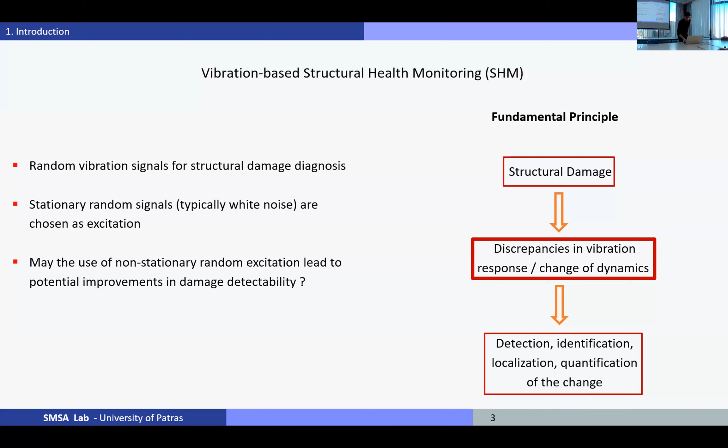With all this being said, the question is still important, but rather of theoretical importance than practical, and concerns whether the non-stationary nature of these excitations facilitates the damage detection ability. But this may change in a laboratory setting, for example, where the excitation is fully user specified. Practicality is then restored.

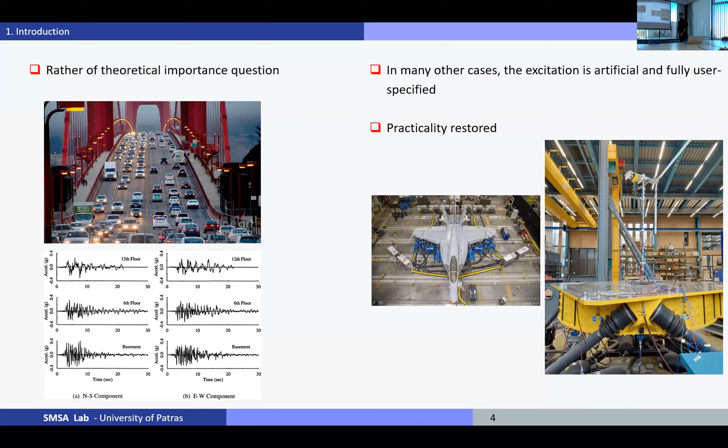The underlying idea is that non-stationary excitation is characterized by richer structure and more complicated properties. These properties involve the autocovariance function and the power spectral density function, which show time dependency. The mean value may also be time dependent. These rich time-dependent characteristics, compared to the stationary counterparts where there's no time dependency, are carried over to the response and may be more prominently affected by damage, thus leading to improved diagnosis.

To illustrate this and make you understand better, here on the left we can see the power spectral density of a non-stationary signal. We can treat this spectrum, which is a function of two variables, time and frequency, as frozen-time power spectral densities at every time instant. So it is easily understandable that it's easier to detect damage when we have this instead of just one power spectral density function.

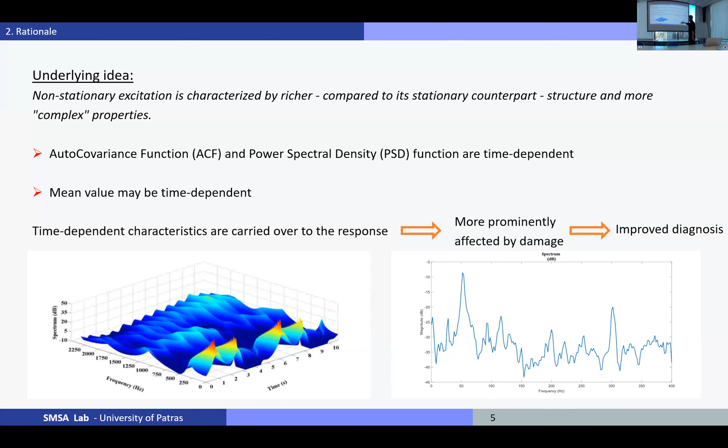In our study, we employ a non-parametric statistical time series damage detection method, with the characteristic quantity being the power spectral density function of the structural response. The excitations we are testing are of two types: first, conventional stationary white noise, and then a non-stationary one produced via a TAR model spectrum.

We have also employed two structures: a one degree of freedom mass-spring-damper system in MATLAB and a composite beam designed in Abaqus. Both structures are used under healthy and unhealthy structural states. Damage detectability is then expressed as a distance in the response PSD between the healthy and damaged structural states. The idea here is very simple. The higher the distance between the response PSDs, the higher the discrepancy between them, and this leads to improved damage detectability.

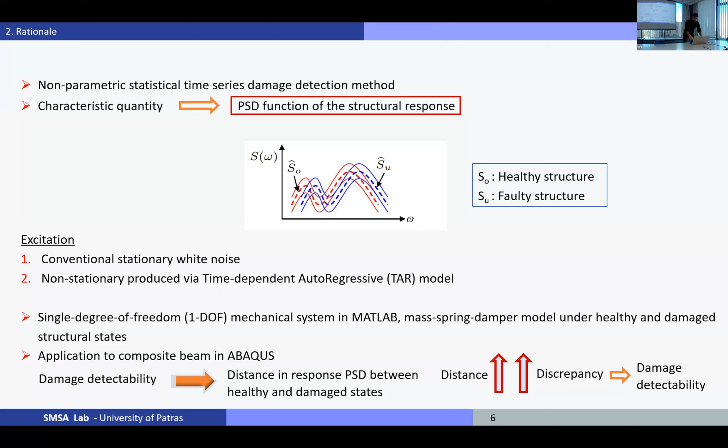In our work, we are firstly computing the theoretical output spectrum using mathematical formulas. We do this for both the stationary and the non-stationary case. The linear mass-spring-damper system is excited using the spectrum of non-stationary TAR2 excitation and the spectrum of stationary white noise excitation. And then we derive the output spectrum in both cases. We also do this for a damaged structure.

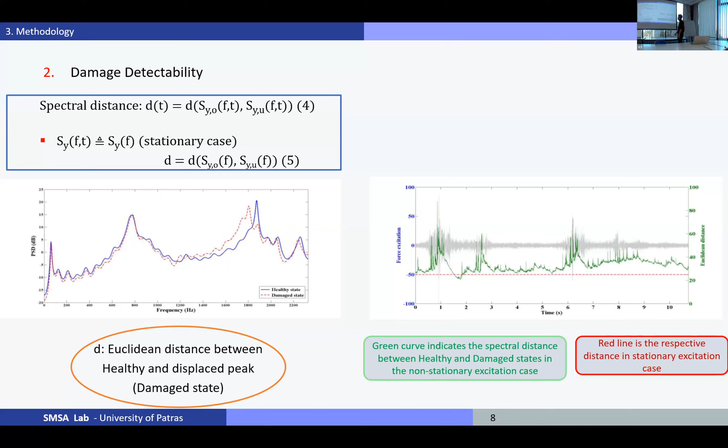I have inserted a plot from a very similar research work, which shows that indeed the distance is higher in the non-stationary excitation case. The distance between the damaged and the healthy output power spectral densities is higher in the non-stationary case, and this suggests that non-stationary excitation may potentially lead to better damage diagnosis.

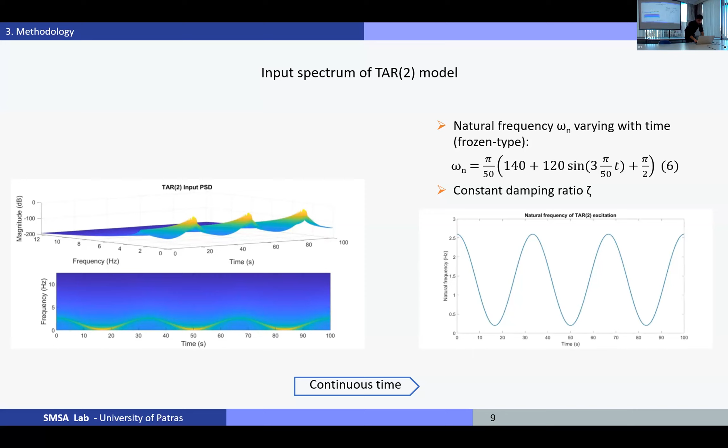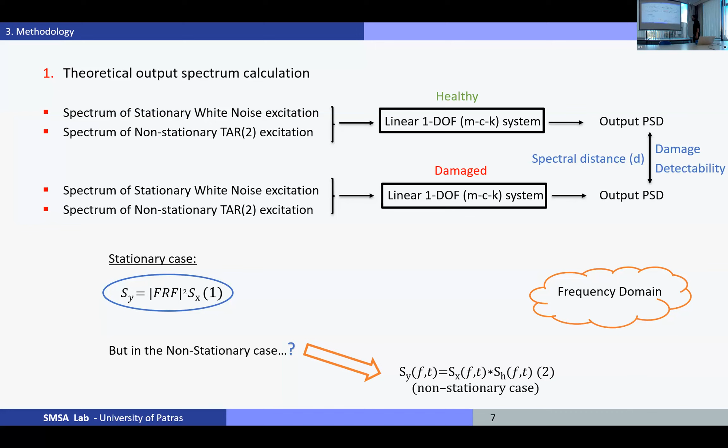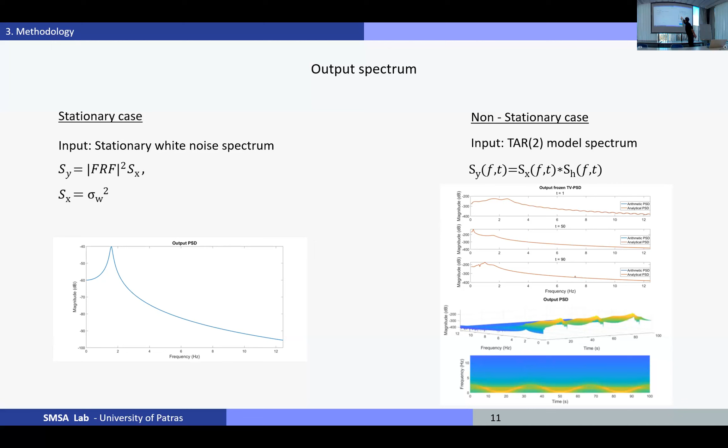This slide summarizes what has already been said. Here we can see what we used for input in the stationary case and for input in the non-stationary case. And here is the resulting output power spectral density function. And here is the non-stationary, which, as already stated before, can be treated as frozen type power spectral density functions at every time instant. We can also notice that these output spectra are influenced by the dynamics of the structure, since we see a peak at the natural frequency of the system, which is approximately at 1.6 Hertz. You can also see the peak in the non-stationary case.

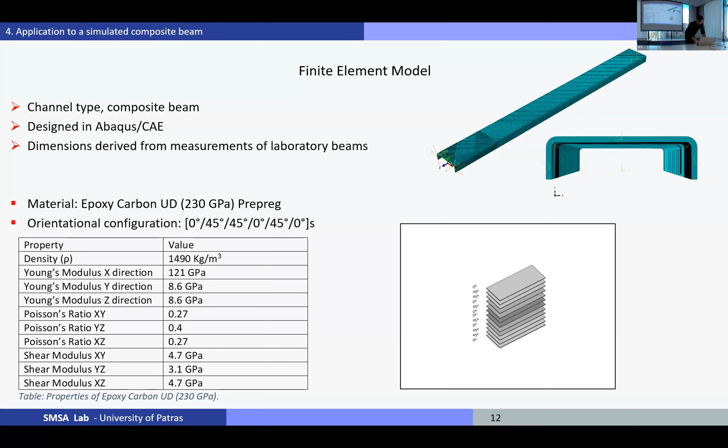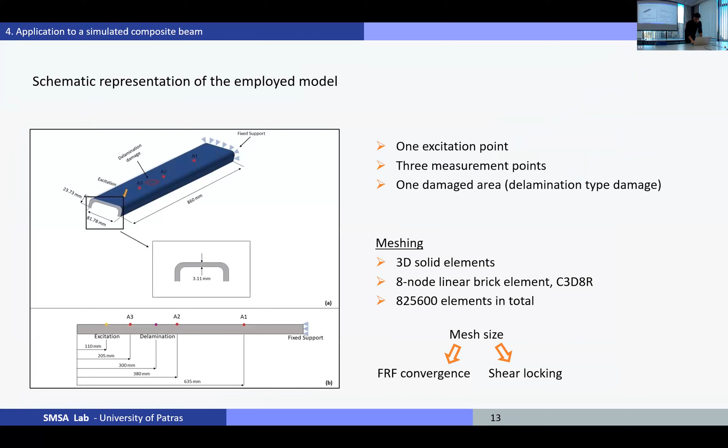And now I will give you a quick overview of the composite beam model, which was designed in Abaqus. The dimensions were derived from measurements of laboratory beams. We see the material used and the configuration of the plies, which is symmetrical. I don't want to focus so much on this, and there is one excitation point. There are also 3 measurement points from where we are going to measure the acceleration response of the beam. There is also one damaged area. The damage scenarios are 3, and are all of the delamination type damage of 3 different magnitudes. This damage was represented by overlapping duplicate nodes, so that the plies can open during an analysis of the model.

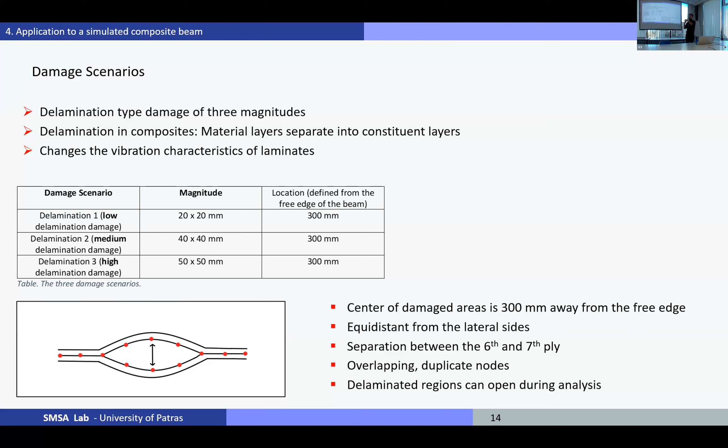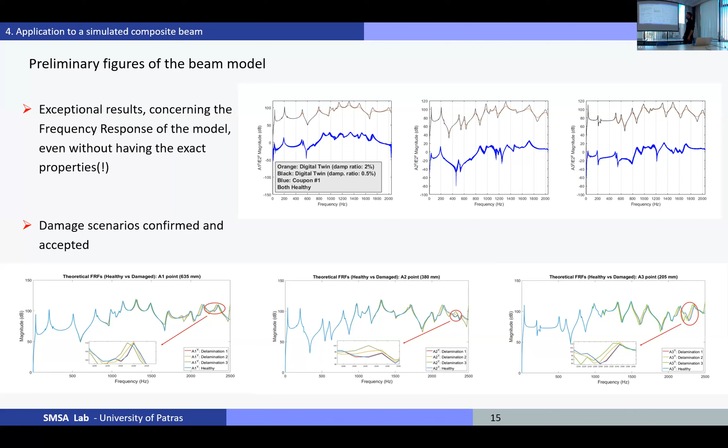And also, the three delamination type damage scenarios are confirmed. As we can see, we see some deviations between the healthy and the damaged structural states. This means that our damage scenarios are okay to use.

As we are going towards the end of the presentation, I would also like to quote what needs to be done in order for this work to be complete.

We need to consider some damage scenarios also regarding the 1 degree of freedom system in MATLAB. We also need to calculate the output power spectral densities in all structural states and compare the results. A genetic algorithm may also be used for optimizing the non-stationary excitation design, with the optimized parameter being the natural frequency of the non-stationary excitation.

Regarding the finite element model, we will run some Monte Carlo simulations on the composite beam. After that, we will assess the benefit of using non-stationary signals instead of the conventional stationary excitation.

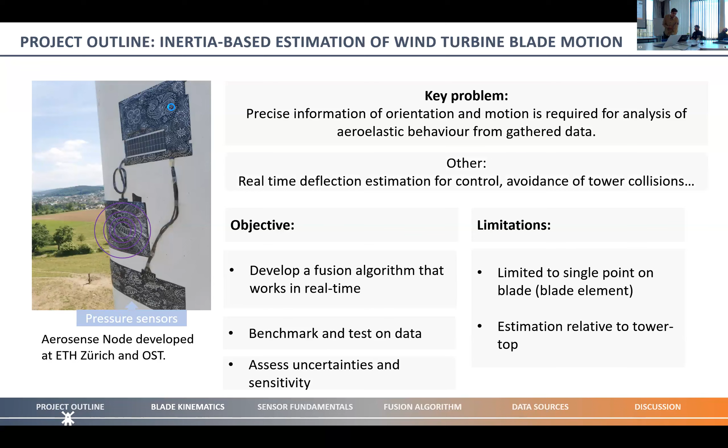So to outline, we start with the inertial sensor and we know where we want to go. We want to achieve an estimate of the blade position. And there are basically two approaches that we can follow.

The model-specific approach heavily involves structural dynamics. We can simulate the whole blade, its aerodynamic conditions, its motion, especially the deflections. For this, we need rather detailed knowledge of the blade, material, and real-world behavior. This greatly varies from the manufacturing specifications, but it has the benefit that we get the whole deflection. We can estimate loads and stresses.

The second approach is model agnostic, where we just pretend that our sensor basically free floats through space, not even attached to anything, and it rotates about some point, and that's all we know. So we completely ignore the blade, and then later use the fact that this sensor is attached to one blade segment to work backwards to extract the blade state. What's special about this kinematic approach is we have pure motion, so no forces, no masses, no impulse, no energy, which makes it easily applicable to any blade without structural information.

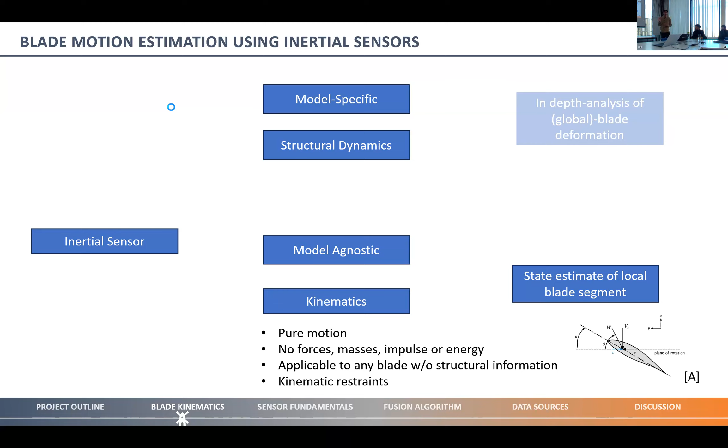And we can use known kinematic restraints, for example from the degrees of freedom, to couple the different dimensions. And that's what we work with. I chose this approach.

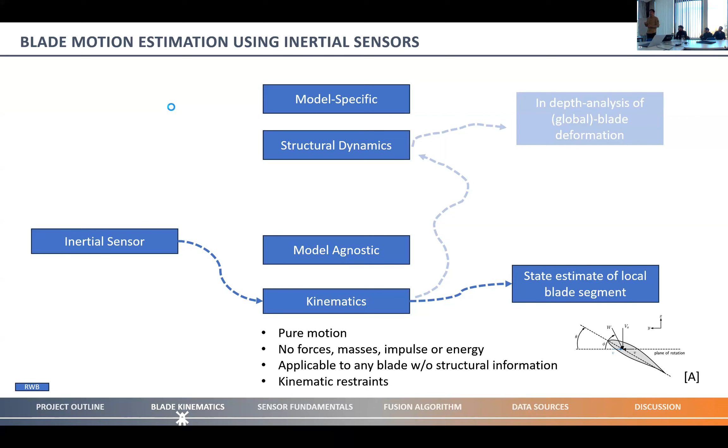Something you sometimes see in literature is that you use kinematics to kind of filter the inertial sensor data, and then later use the improved measurements for, for example, some model simulations. I might do that if I have the time, but for now it's not scheduled.

Okay, so next we will go into the blade kinematics. Any questions so far? Maybe best for the recording, you keep them for the end. Okay, keep them for the end.

So as I wrote here, blade kinematics is a question of varying complexity. As with any other model, there are different complexities that we can choose, and the more complex we make it, the harder it becomes. We can have this simple turbine that has just 2D, it has 1 degree of freedom, it can rotate, that's it. Then we can have the 3-dimensional turbine with controls.

It can pitch, meaning it tilts its airfoil to get an optimal position in the wind flow. It can yaw to turn towards the direction of the strongest wind, and then it can also rotate around - here you see it's a tilted axis. And then last but not least, you can have something crazy like a floating offshore platform where the base can move, the tower can deflect, and then the blades have torsion. They can deflect flap-wise and edge-wise.

For now, I will stick to the simple model, and I think it's sufficient to understand the whole concept. It doesn't really change with added complexity, it just gets more - it just takes longer, and I will make a lot more mistakes.

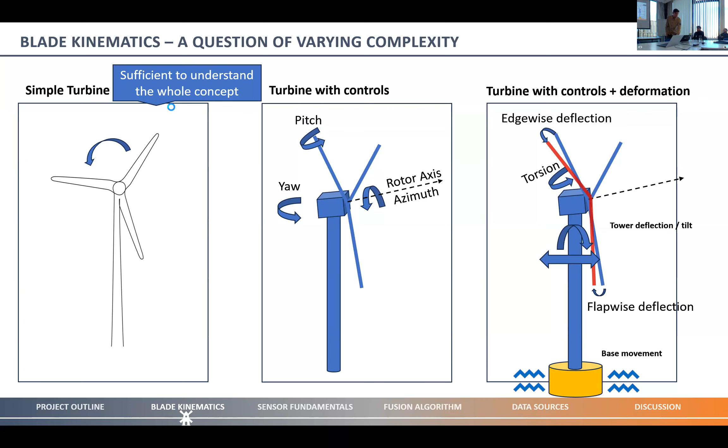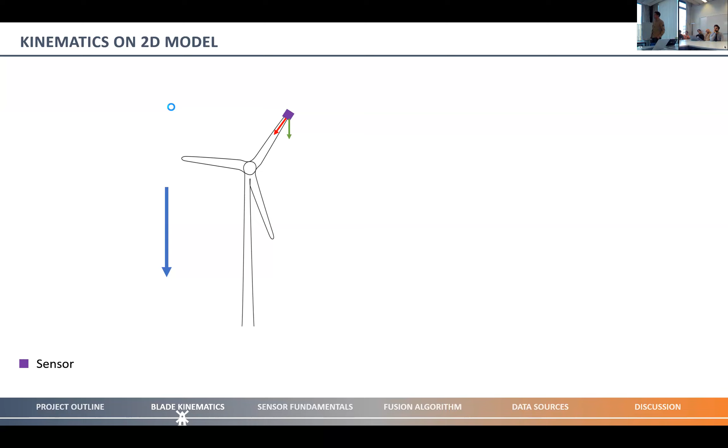So let's take this model. This is our turbine. We have gravity. If I was a real engineer, it would just be a line and a dot and another line - it's a meter. And we put the sensor on top of the blade.

Let's put in some coordinates. So we have base coordinates, attached to ground, to an inertial system, roughly the Earth. Then we have the tower, which is rigid, and the sensor rotates around the tower.

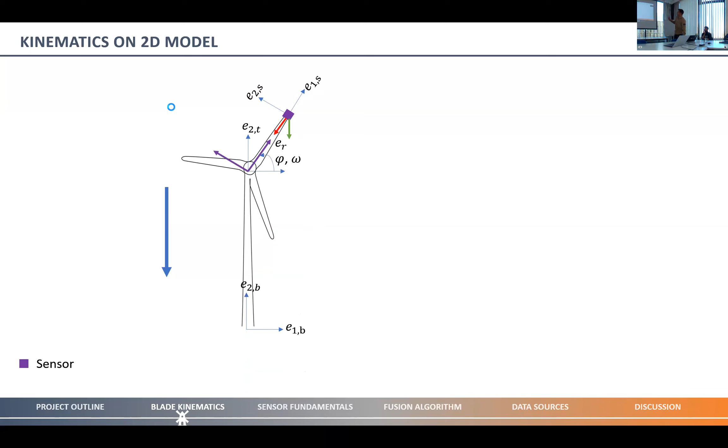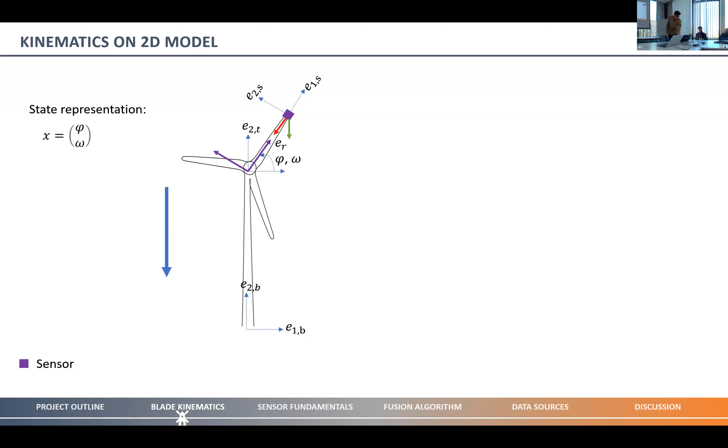We can describe this in polar coordinates. So we have our ER and our E-phi, which disappeared. The whole state can be represented with 2 variables: one is phi, the angle, and the other one is omega, our rotational speed. And with the state transition matrix, I think it's here, we can also get all states in the past and in the future.

If we look now at what the sensor experienced during this continuous rotation, we have an acceleration in the sensor frame that is composed of a centripetal component that always points to the rotation center - that's the red one. Then we have a gravitational component that splits between E1 and E2 and depends on the angle phi. And since this inertial sensor can also measure angular speed, we have the rotation on E3, which is perpendicular to the plane shown here. And if we think now, how can we get this state from the measurement?

Quite simple. We measure the omega, the angular speed. Then we use the known radius to remove the centripetal component from the acceleration. And then we can use, for example, arc tangents to get the phi.

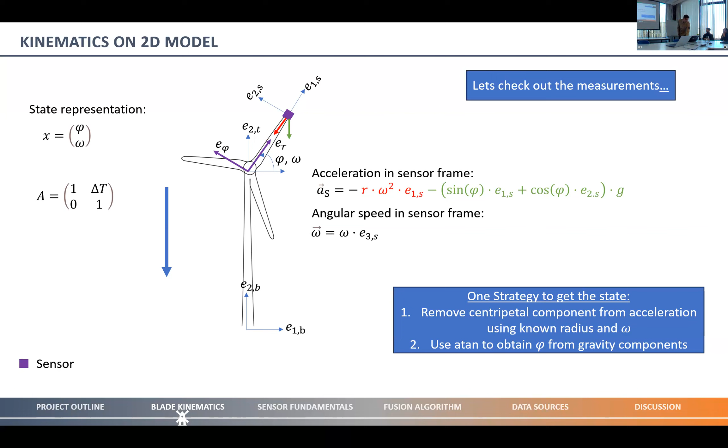Okay, let's check how this relates to our measurements. Now we'll go to the measurement fundamentals.

So the sensing technology is kind of based around MEMS, because MEMS is very cheap. It takes very little power, and cheap is something you always want for energy technology. And also, since it's on the blade, you cannot really run cables for any power-hungry equipment. So MEMS is what we will have to work with.

MEMS stands for Micro Electromechanical System. And it's quite interesting, those tiny sensors actually have moving parts in them. So you can print pretty much anything. You can print gears, you can print valves.

And one measurement system is the IMU, which is commonly used in drones and phones. It consists of usually an accelerometer.

As I said, it's a moving part, so you have a suspended mass. And due to inertia, if you move or accelerate the sensor, this mass will kind of lag behind. You have springs here, and the springs are then extended. Between these whiskers, you can measure a change in capacitance.

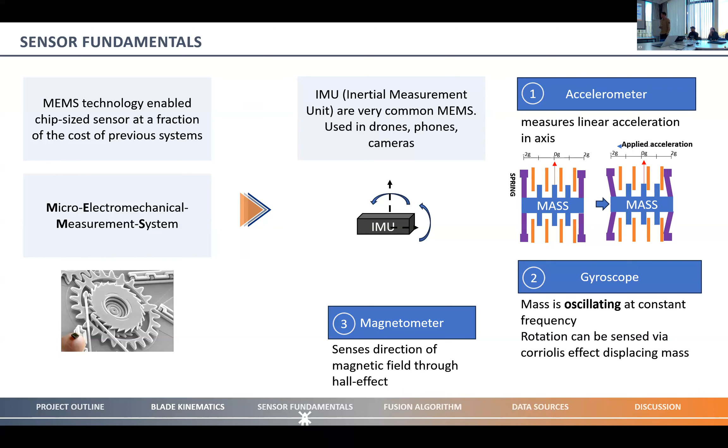Why is this so important? The big problem with MEMS sensors is that since they're mechanical systems, they are really susceptible to vibration and temperature. You have crosstalk if you have extreme accelerations in one direction, as we have in a rotating wind turbine. It will also influence the readings on all the other axes and also the other sensors, for example, the gyroscope. So we really have to expect measurement noise.

And the key takeaway is that we cannot operate directly with sensor data. You have a simple sensor model, so we have a true value with some random noise and a bias, for example, but an accurate sensor model would involve a lot more terms dependent on all kinds of environmental variables.

How can we mitigate this? We have to calibrate. That's something often neglected in literature, because a lot of calibration can be done on the sensor itself, and it changes the output. But after that, it's no longer really possible to see what this calibration was. That's the difference between hooking up analog sensors directly.

And then another method is sensor fusion, where we combine different noisy measurements to decrease uncertainty in one.

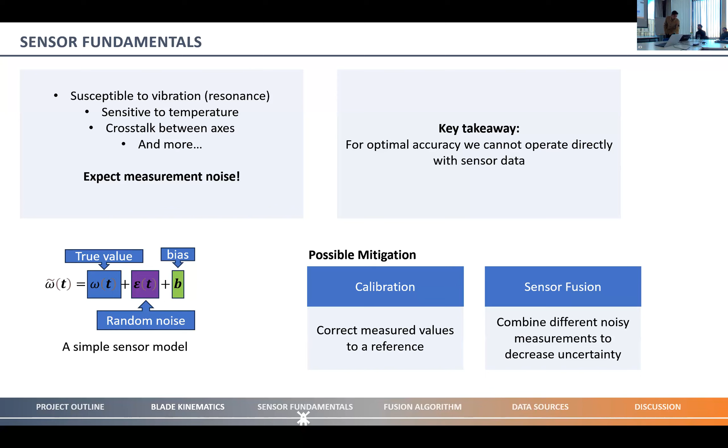So if we look back to our example for the 2D turbine, I plotted the true angle of rotation in blue, and I added some random noise to the angular speed and to the accelerations, and tried to use these perturbed measurements to directly estimate the angle. You can see it here in orange. Actually, it aligns quite well in the mean, but it shows a behavior that doesn't really resemble our turbine. For example, the turbine cannot really move back and forth.

And then in green, I employed a simple complementary filter where I used once the acceleration and then included propagation using the angular speed for the state development, let's say.

And for even improved accuracy, it makes sense to use dynamic filtering. For example, the Kalman filter, which is a recursive filter that propagates the state based on a state transition model and then uses measurements to correct it.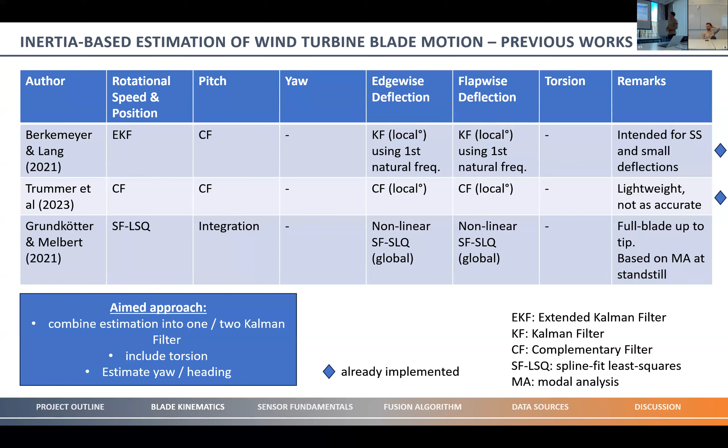So my goal is to assess the existing methods and develop one or two improved Kalman filters, probably extended Kalman filters, and then also include torsion, which has not been addressed by literature, and estimate yaw from magnetometer readings, because right now yawing is not accounted for, and on modern turbines you have operating conditions with continuous usage of yaw to align the turbine, and it's just a state that these approaches cannot handle. The first two I already implemented, and I will test them in the near future.

Any questions for later?

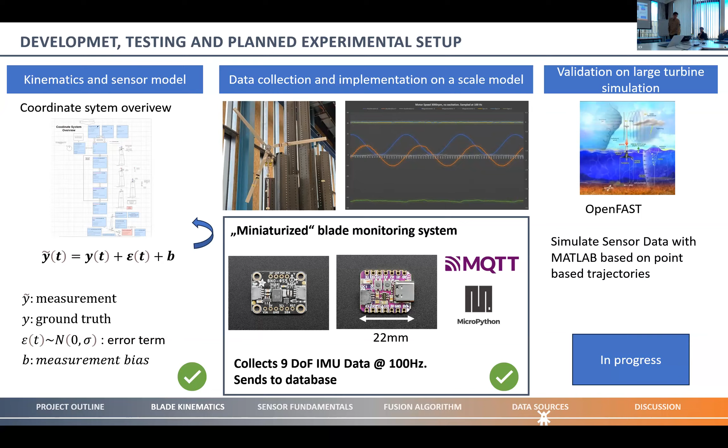Some challenges I'm facing. Academically, right now I'm really working hard to improve my mathematical understanding of model-based estimation methods. It's not so important for the development, because you can still get the filter to work, but to prove why it works and when it works, what the limitations are, you need a really solid understanding. And then with the method, what's difficult is the complex interaction between the different coordinate frames. For example, if you have a blade that is deflected like this, and then you apply torsion, it has an influence on all three measurements that you take from the sensor.

And another challenge is including multiple IMUs. So 2 weeks ago, Matteo had a really interesting talk about timing the different readings. It would be quite interesting, especially if you have a turbine with a flexible tower, to have an IMU in the tower, and also if you have an offshore floating turbine, you need an IMU in the base.